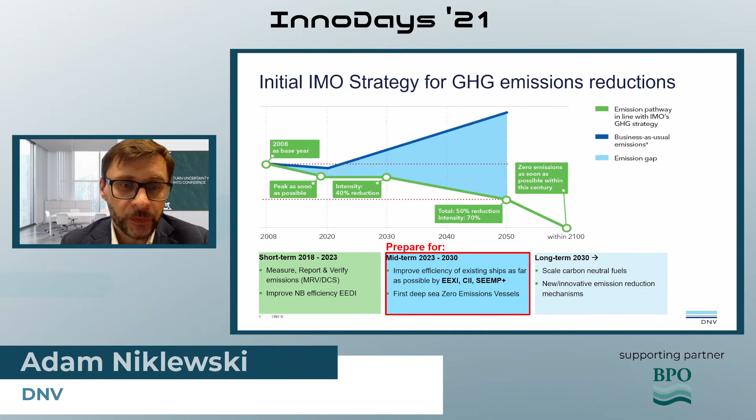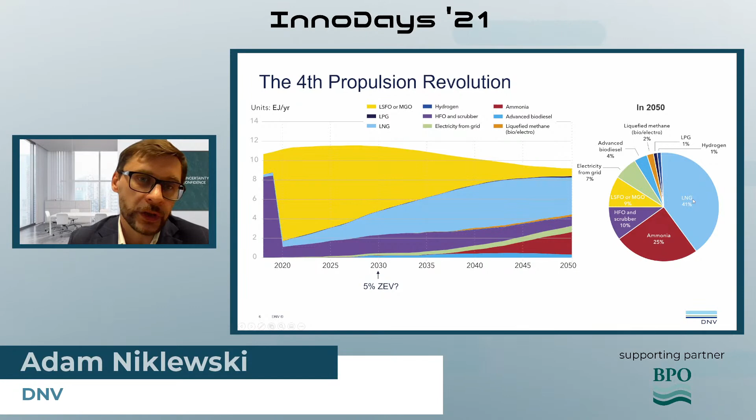Another graph which might possibly be known by some of the audience is the fuel mix of the fourth propulsion revolution, which we are now facing. According to the DNV outlook, it seems that LNG, which is one of today's topics, will definitely play an important role, reaching about 41% of the future fuel mix, which is very significant.

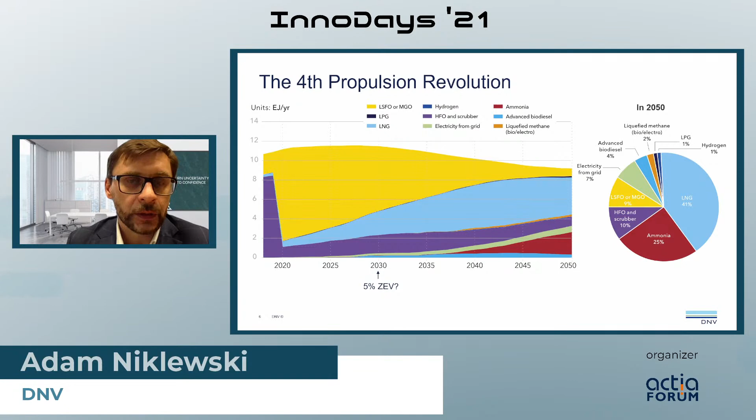And that can also be seen later on one of the slides when I present the current order book. So of course, this revolution gave us alternatives other than LNG, but we also need to remember that if we are talking about other energy carriers...

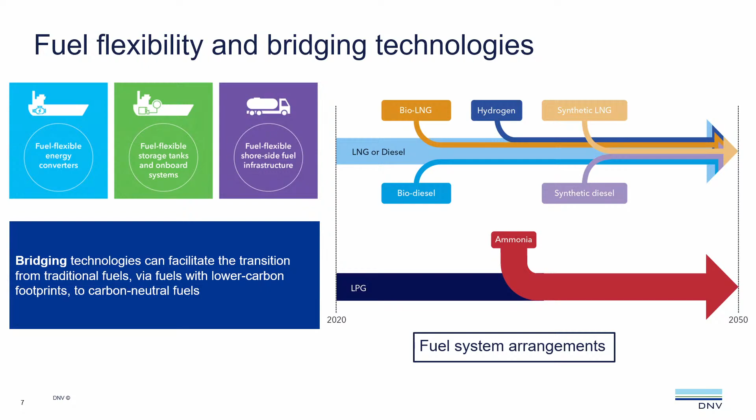Most of them nowadays still depend on hydrogen production via the steam reforming process. So methane is a key element, as long as green hydrogen is not yet available at a price level which is acceptable, which is another factor.

But let's go into more detail on the latest Marine Environment Protection Committee session, so-called MEPC 76. It's been decided that the CII, the Carbon Intensity Indicator, reduction was set to increase by 2% per year in the years 2023 to 2026.

After that, what comes next will be decided later on, and I will present the full timeframe for the common decision. What is also important in the context of today's webinar...

On the latest IMO MEPC committee, more detail was also given on the NOx Technical Code. So there is now a unified interpretation of the Technical Code 2008 - the clarified requirements for testing and certification of engines with Selective Catalytic Reduction systems, so in simple words, with catalyzers on board the vessel.

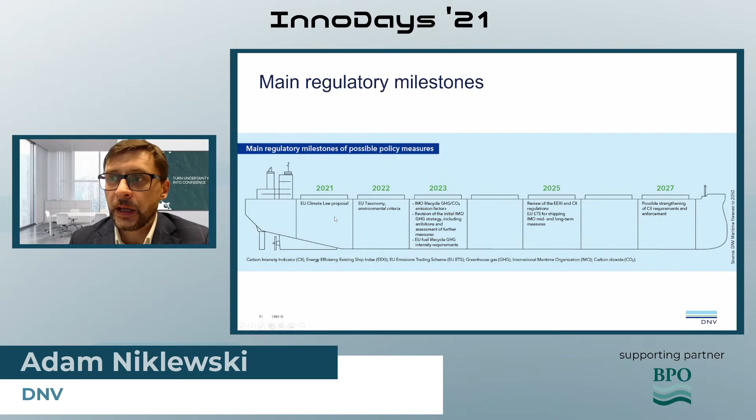It's important that now we have this EU climate law proposal, now known as Fit for 55. The taxonomy and the numbers especially will be decided next year, and in 2023 it will come into force if we are talking about the emission ETS handling.

And the details on the incentives to the use of certain fuels. Nowadays, what we can see, LNG unfortunately is from the EU point of view in a little bit lost position. So definitely the EU does not see LNG as the transition fuel, but that is not necessarily fully correct, because we are nowadays not considering carbon capture and storage, the sequestration of carbon dioxide, and that is due to the fact that we need to develop the infrastructure to store the carbon dioxide for the future and further processing for synthetic fuels.

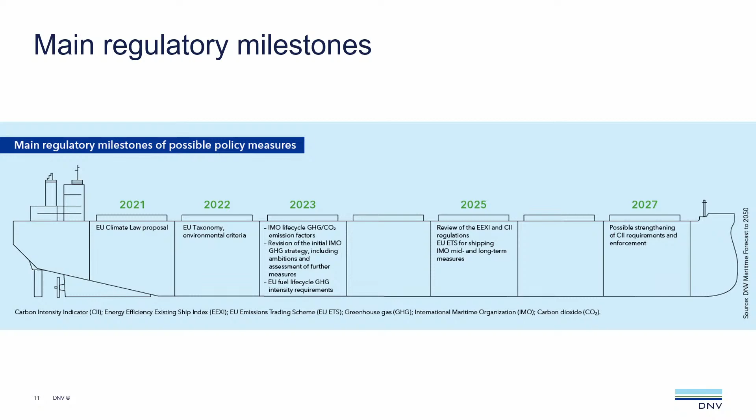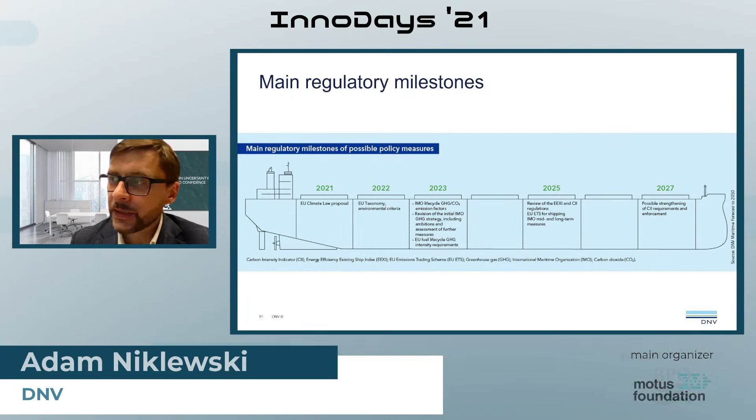I believe the other lecturers for today will give more details on synthetic LNG and its future. What is important in 2025 is that, going to the IMO first, the EEXI and CII principles and the data will be reviewed, and the next numbers for the years after 2027 will be decided. At the same time, the EU will reconsider the rates for the emission trade system. So in 2027, based on the decision in 2025, that will be the possible effective date of the new numbers.

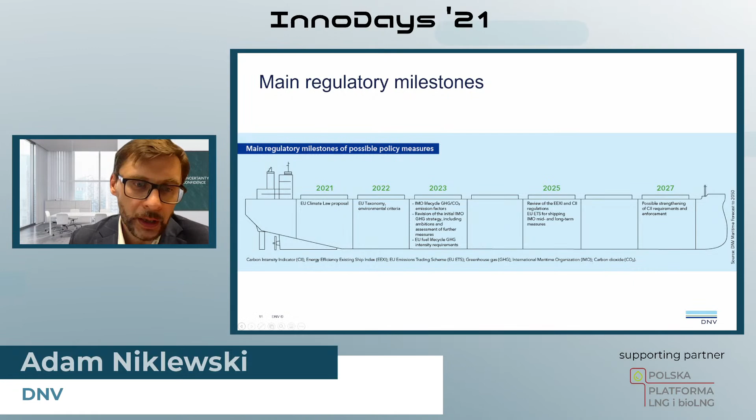So just to summarize the first part of my presentation about decarbonization transformation: it's about 1 billion tons of GHG gases which have to be zero by the end of the century. Once more, 70% reduction on carbon intensity within 2050 and 40% reduction in carbon intensity by 2030. That will require more than IMO regulation, and here locally the European Union gives a hand, or is at the forefront of this more ambitious and more regulated, more detailed regulated solutions. Definitely that will be a big need for investments, assessed at 1 or even 2 trillion US dollars till 2050.

What is also important, there is nowadays on the IMO agenda the research and development fund, which will be financed from a kind of tax on each ton of future fuel oil, and as well what we can nowadays see from market-based measures, if we want to capture the CO2 and utilize it effectively. Unfortunately, the price of that is calculated at $1,000 US per ton. Nowadays we know it's about 60 euros, so more or less unfortunately we are heading towards these kinds of prices.

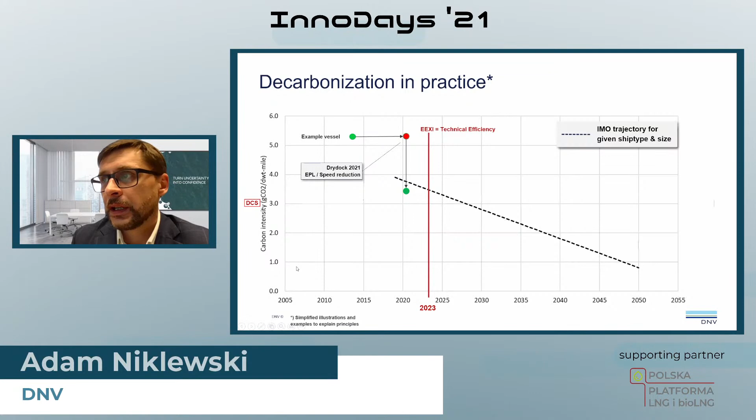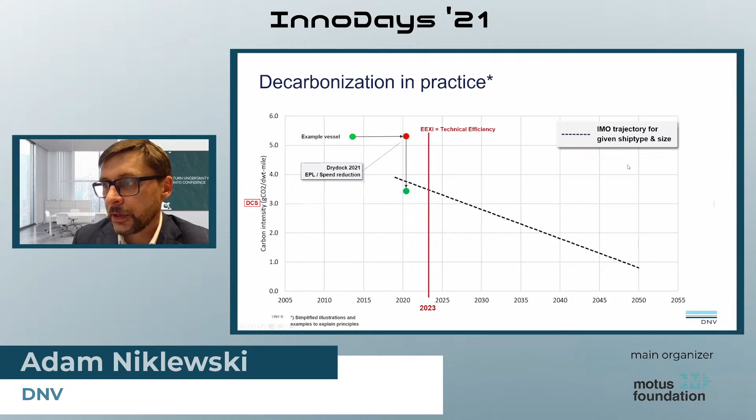So if we have the example vessel, and we made some measures to reduce the energy efficiency index of the vessel, one of the easiest is speed reduction. And then facing 2023, we place the vessel like that, but that is not enough. As you see, we have these grades on the CII operational efficiency, so the requirements will be more strict, and the vessel unfortunately will need to be adapted to the new requirements almost year by year, or it can be done once but with higher capex.

So our example vessel, which has its class period in 2026, the next one, so possible dry dock and some more improvements. In this example, the propeller was exchanged, and also it was given a nozzle, the Mewis duct type, which brings the CII level to class A in 2026.

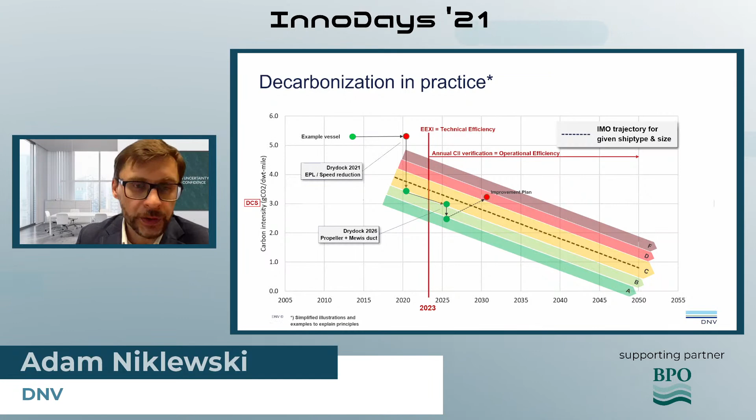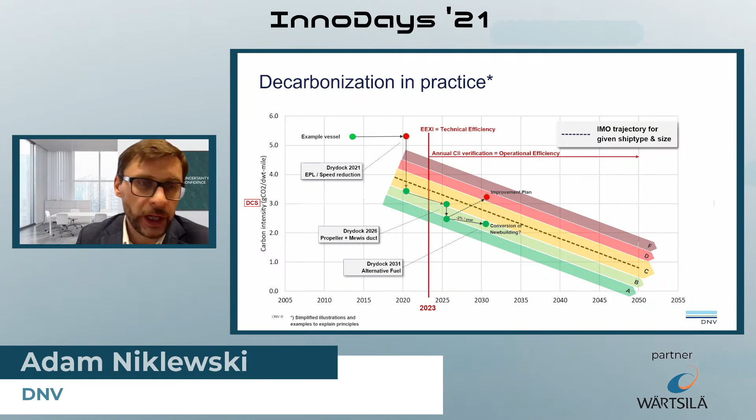But as time passes, we have some improvement plan. The vessel by time is also getting old, so from a machinery point of view the effectiveness decreases with age, so it will be necessary to have some improvement plan, or it can be solved by conversion or new building, considering a change to alternative fuel.

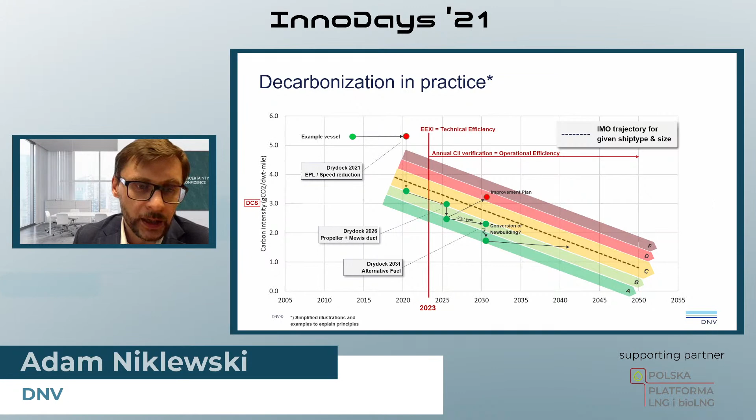So all this iteration has to be reconsidered as long as the life of the vessel. So what is important for the ship owners? The importance are, one more time...

Just a small refreshment on these dates which were presented previously. The SEEMP on board, January 1st - this is the first milestone to be faced. After that, on 31st of March, so 3 months later, the first CII reporting and rating has to be performed, and then EEXI by first annual survey, up to the end of 2023.

And how can DNV, in this stormy, let's say, environment of new regulation, new requirements, and a lot of actions needed - how can DNV help their customers?

First of all, in 2017, we developed a Carbon Robust ship offer, which is one that is competitive and thrives in any decarbonization scenario.

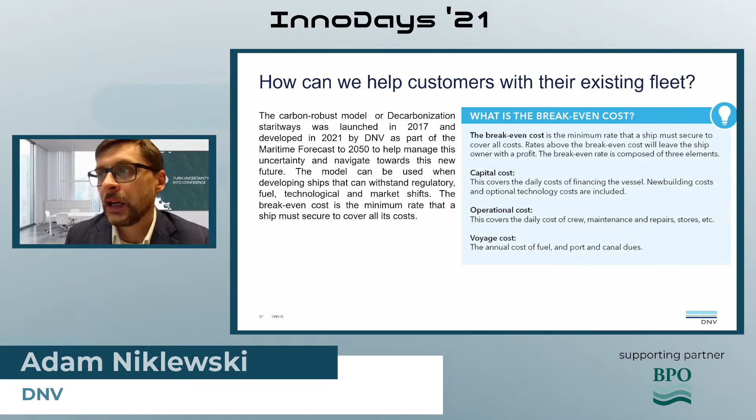Nowadays it's been even more developed into the so-called decarbonization stairway, how to deal with it. This is one of the DNV offers which might help to navigate within this new market waves.

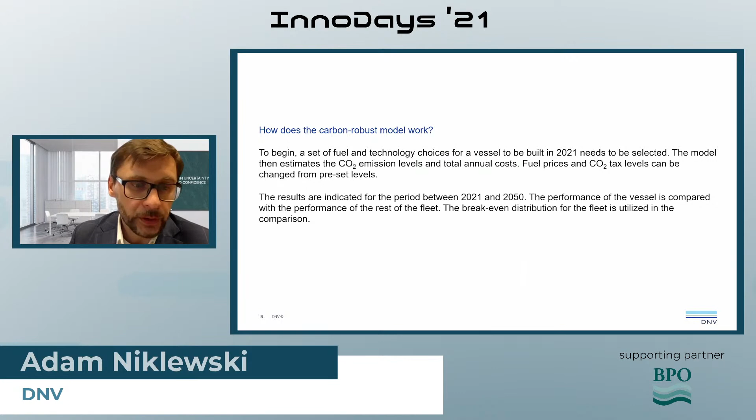I'm sorry, I'm going too quick. So if you combine this with the curve, which is actually the CII requirements, then we may support the owners with the calculation and basis for the decision to be made.

What is important on this calculation, and I'd like to be honest on that, is that the ETS trade rates are not yet established, so no benefits from CO2 sales is considered - but once that is established, we will of course adjust our model on that part.

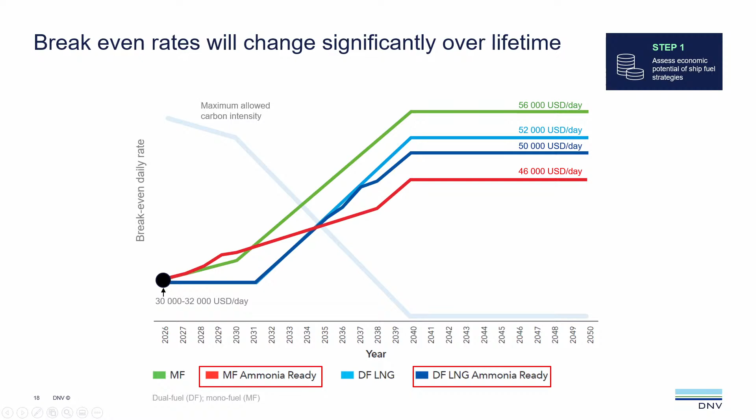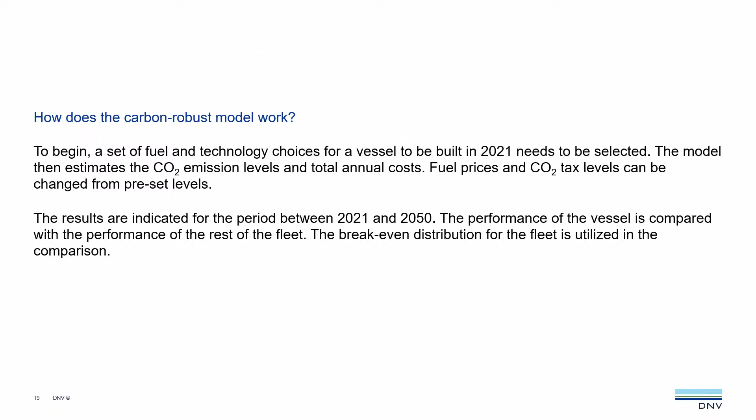In principle, how does it work? The set of fuels and technology choices for the vessels - now we are talking about new buildings - needs to be selected, and then we estimate the CO2 emissions and the total annual costs, as presented on the previous slides. The fuel prices and CO2 tax levels can be changed from the preset levels also presented by me.

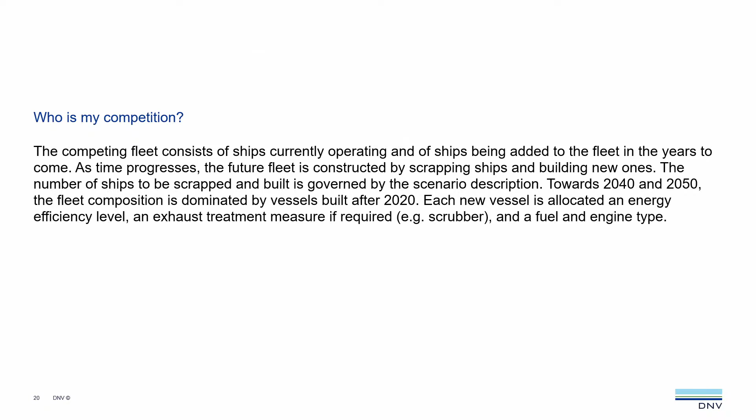What is also important is the definition of the competing fleet, because that consists of ships currently operating and ships being added to the fleet in the years to come. As time progresses, the future fleet is constructed by scrapping ships and building new ones. The number of ships to be scrapped and built is governed by the scenario description, which also gives us a strategic point of view on how to handle our fleets.

For example, air lubrication of the hull was one of the points which might be considered, and the hull shape that was presented in one of the first slides. Hull coating - I will show you an example in the next slide as well.

Then we can change the propulsion system, for example the nozzles. And then, very important, the alternative fuels.

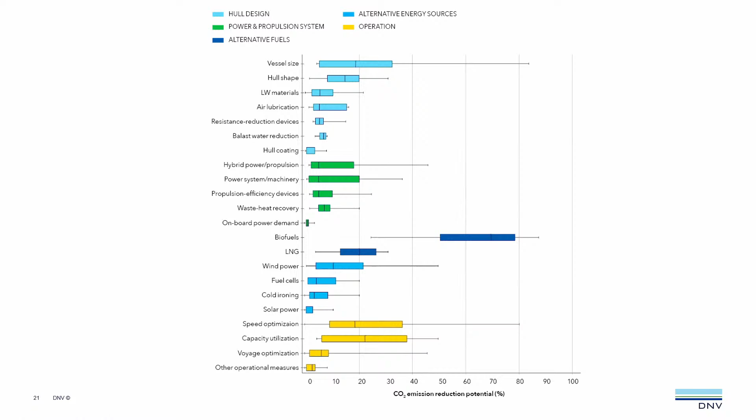Here I have considered LNG and biofuels, especially Bio-LNG, which can be easily blended with the conventional LNG and might give a lot of benefits, especially in light of EU regulation - at least at the hearing stage of the EU Fuel EU Maritime Directive. It's one of the acts which considers the fuel well-to-wake - the first act which considers the fuel in the full scenario, from harvesting to propulsion. So it might give a lot of advantages in that case.

And of course, the supporting energy sources received from renewables like wind, solar, cold ironing. This is, from my point of view, quite interesting. For me it was rather 'shore connection', the common name, but now we come back to the historical name called cold ironing, direct fuel cells, and others.

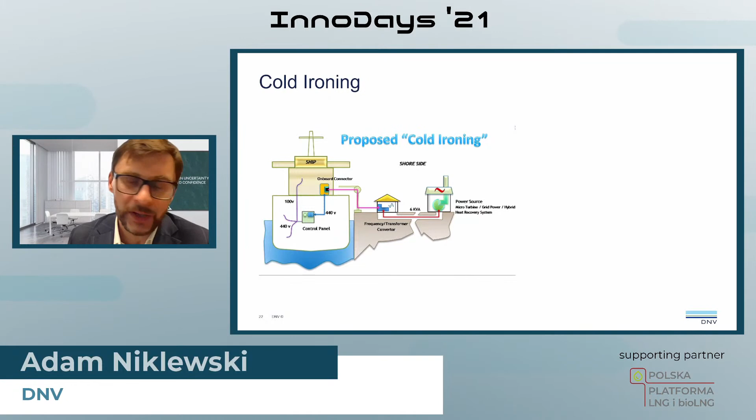And of course, then we have some possibilities on the logistics of the vessel. So it's an interesting point to understand what cold ironing is. In simple words, it's just a shore connection when the vessel stays at the pier.

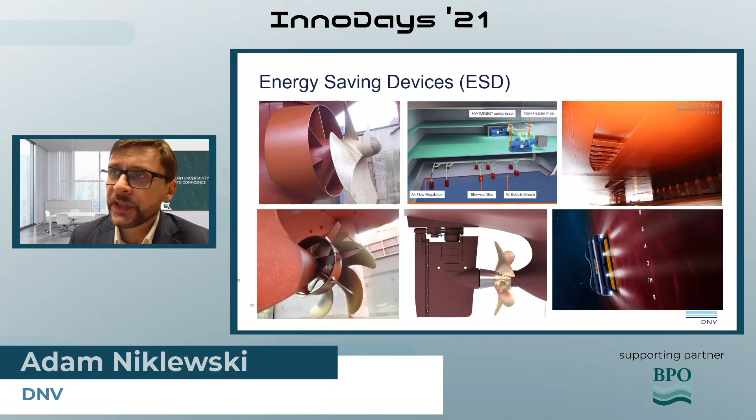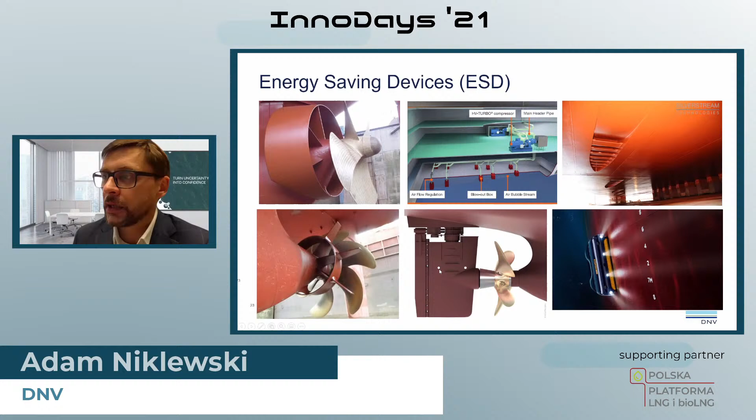Just a couple of examples how we can deal with ESD, energy saving devices. That might be nozzles, air bubbles, another type of the air generator by the hull shape. It can be, of course, the additional treatment of the coating with the regular cleaning and polishing, and of course the correct pitch propeller combined with the rudder system.

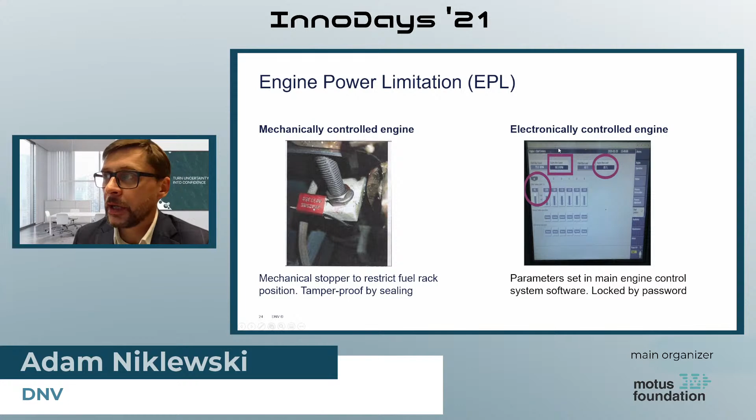The other solution can be the engine power limitation, either in the digital way control, or the mechanical, physical stoppers.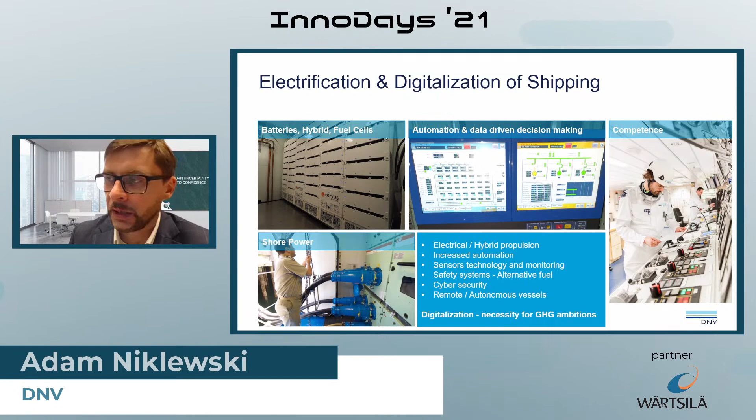And definitely without digitalization, if we do not support ourselves with digital tools on the steering of the propulsion and improve the ship route, that will not be able to be handled only by men. Supporting digital tools is critical and definitely necessary for the future.

Of course, we as a class society support this transformation, but definitely through ensuring safety. I'd like to skip to the next slides because I'd like to touch on at least the last part of the topic for this keynote speech. But before that, I'd like to present a couple of the tools which we offer at DNV.

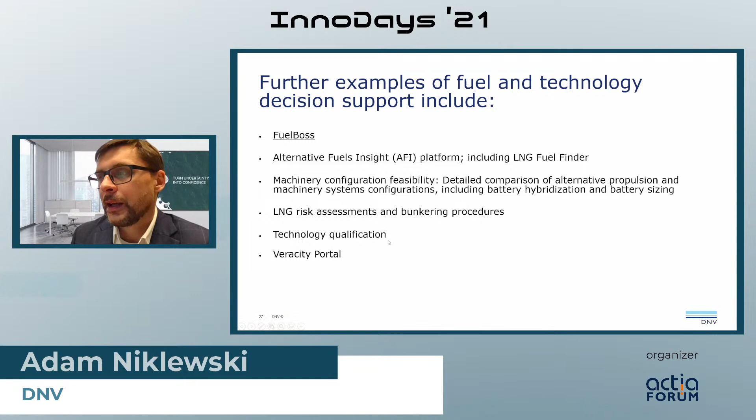It's the Fuel Boss application, the Alternative Fuels Insight platform, which you are very welcome to have a look on. That also includes the LNG fuel finder, a very useful tool with respect to LNG as propulsion. Then we of course offer the LNG risk assessment and bunkering procedures. We of course approve the technology, which is our core activity. And for existing customers, all other tools can be found on the Veracity portal.

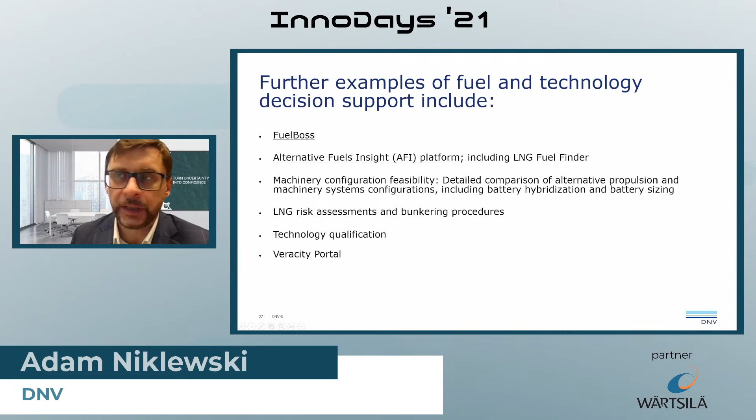So just to touch on more detail on LNG and the question in the topic - if we are talking about SOx, sulfur oxide, LNG is by definition a sulfur-free fuel. It's a little bit different if we are talking about nitrogen oxides.

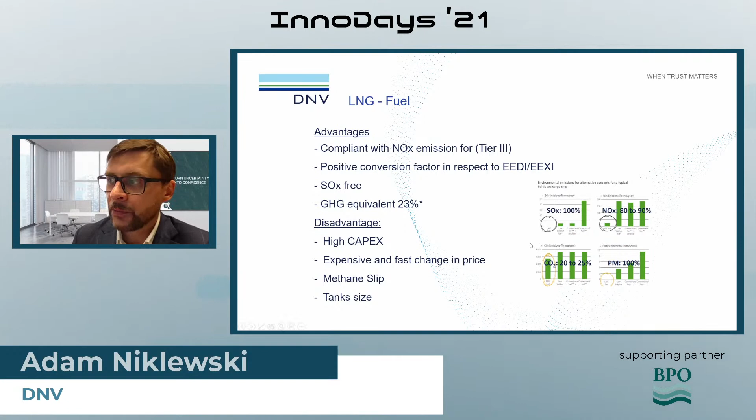Definitely, if we are talking about the internal combustion engine, the GHG reduction is assessed between 20 to 25%, but it might differ if we use LNG in a fuel cell, not in the internal combustion engine, because then we lose the bad impact of the methane slip, which does not occur in the fuel cell. So it can be even better results with LNG as a fuel, without the capture of carbon dioxide, which we are well known for. This technology is ready, and some examples of installation are in place.

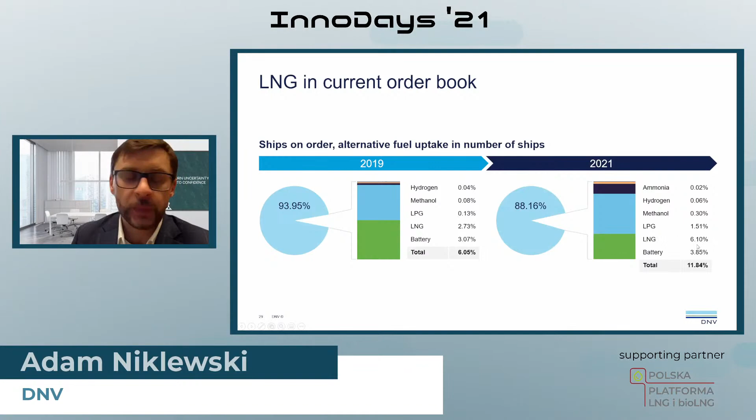I'm going to the end. Just to show you one more thing, LNG now in the order books is a significant position - 6.10% of the full order book on new builds. And regarding SOx statutory regulation, there's still in force the carriage ban, which is given by MARPOL Annex VI regulation 14, as I remember. And for LNG, nothing has changed because, as said, it is a sulfur-free fuel.

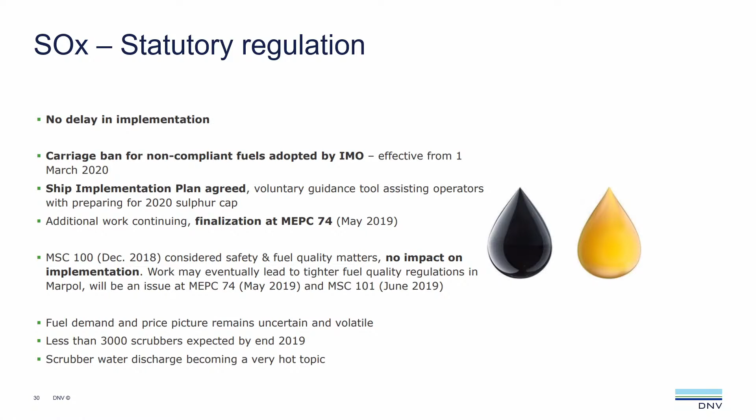If we're talking about marine diesel oil propelled vessels, now the sampling points - this is an element which comes into force already with the renewal of the IAPP certification. DNV supports, one more time, on SOx - especially our dedicated offer is the DNV fuel changeover calculator, which might be very helpful.

Just to summarize, a citation from the Brittany Ferries chief executive: LNG is just a step. We are fully conscious it won't solve it, but it improves. Those that use LNG show how committed we are to decarbonization, because it is a step forward, but we are all conscious it is a step. So just to show that LNG is not a perfect solution, but definitely it's a good step forward. And I would like to leave you with this message for the next presentation.

Thank you for the time. And just another thought - if you thought shipping was boring, look out for the challenge of decarbonization. Thank you very much.

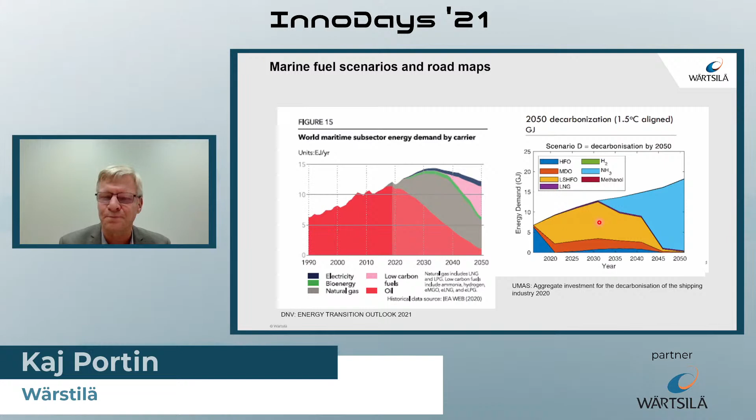I have also taken the UMAS Tristan Smith scenario. Some people believe in LNG, natural gas, as the takeover, and then also a part here for bioenergy and synthetic LNG. And then there are others that don't believe in it at all. What does this say to us? It says that we have to look into the future, how to get through the transition, how to come to net zero emissions, carbon-free, CO2-free emissions.

How we look at it is that today we start with what we have. Then, when we start to get new fuels, first we take drop-in fuels that we can utilize in the infrastructure we have together with the fuel we already use. Then we are also looking to blend fuels, either before the engine on the vessel, or in the cylinder of the engine, so you run on several fuels at the same time. In the future, when we start to get the better fuels, when they are available in quantity and price and beneficial to use for everyone with the legislation and cost, then we are ready to take them into our engines. How do we do this then?

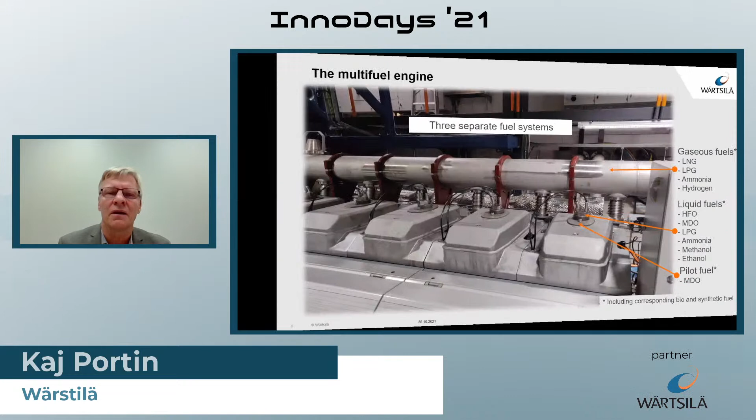Here I have my flexible engine in our laboratory here in Finland, in Vaasa. As you can see, this looks like a standard diesel gas engine that we have at Wärtsilä. We have now prepared this engine for most fuels by having three separate fuel systems, so we have a pilot fuel system. If you have a fuel that is not burning or igniting so well, we can ignite it first with a pilot fuel, so you can get it to burn in the cylinder, and then use the secondary fuel or the main fuel for the whole combustion.

Then we have a high pressure fuel system where we can have, in principle, all the liquid fuels available, and we can then use it in the engine just like a diesel engine.

And then we have a third fuel system, the gas system here on top. Here we can utilize gaseous fuels like LNG or natural gas, and also other ones you see on the list. The good thing is that this also includes bio and synthetic fuel. The engine doesn't know if it's a synthetic fuel or a fossil fuel, it looks at the molecule itself.

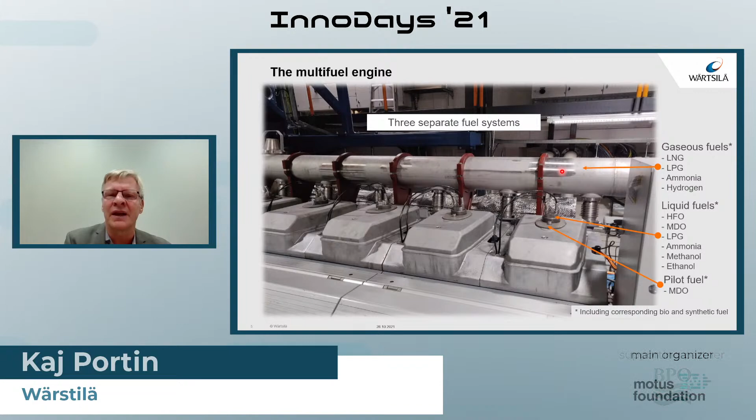This is very important for us when looking into the future, what fuels to use today. We are mostly today talking about how to take bio LNG into fossil LNG, and perhaps in the future also to use synthetic LNG. This is a very important one.

We see that for future fuels we have two main streams. Today you either go gas, and when you get biogas or biomethane, bio LNG, LBG, whatever you call it, you can easily take it in. And when you get synthetic LNG in the future, you can also take it in. Already today, as was shown by Adam, by using LNG, it's the cleanest fossil fuel that we have. Then by taking in bio and synthetic methane, we can also be carbon neutral.

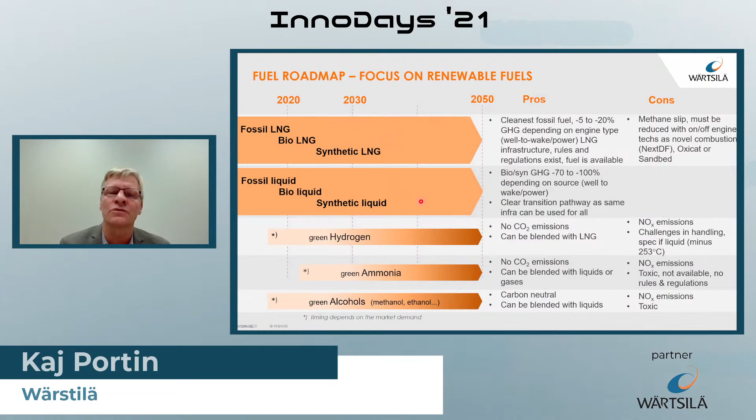The same path, without changing the infrastructure on the vessel and on the bunkering, as it's one-to-one. Then the second mainstream is that today we have diesel and heavy fuel engines and vessels, and these can also take in biodiesel, bio heavy fuel types of fuel when it comes, and also synthetic liquid fuels when they come. And if you have drop-in fuels that can be used, these can also be taken in.

At Wärtsilä, we will not discuss it too much today, but we are also looking into zero carbon fuels like hydrogen and ammonia, and also green alcohols, methanol, ethanol, etc.

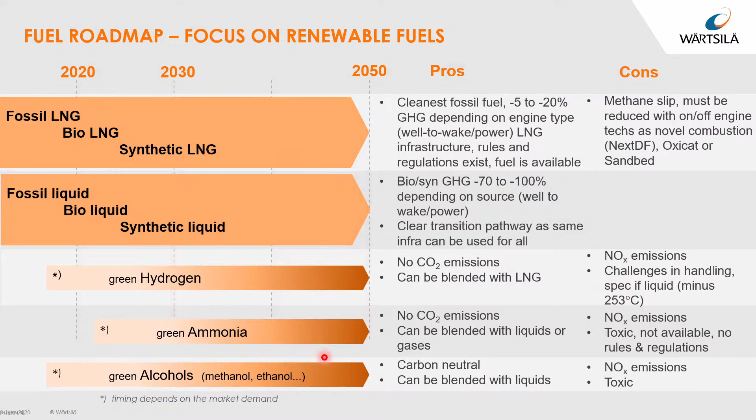So the future for taking bio, to go from LNG to bio LNG, that is already here. Today we have fossil LNG as a starting point, and we make fossil methane natural gas into LNG and then utilize it in the vessels. But we can also then add bio LNG.

To any ratio. So if we get 5% of bio LNG, we can add that. If we get 55%, we can add that. And also in the future, add synthetic LNG into the same vessel, the same system, and even the engine will think that this is a very good fuel. It will even think it's a better fuel than what it had with fossil LNG or fossil natural gas.

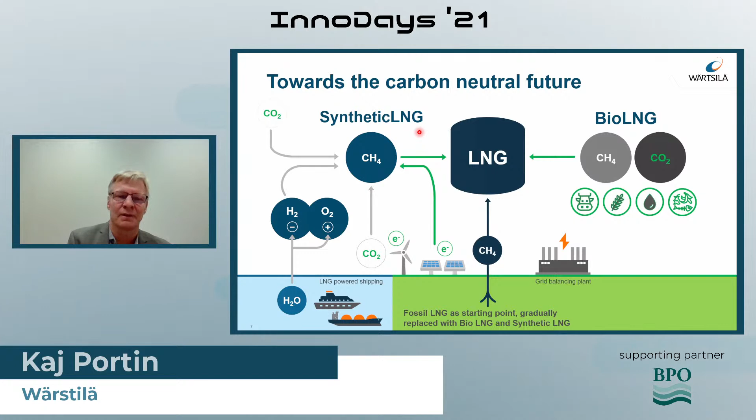One thing that I think Adam brought up that you seldom hear nowadays: we are now talking about CO2 emissions, greenhouse gas, and so on, but we should never forget that we also have local emissions. We have NOx, SOx, particulates that are polluting the air, and this is very important for people living in the cities and at the harbors, to have clean air to breathe.

And now when we are looking into the greenhouse gas emissions, so looking at CO2, methane slip, and perhaps also laughing gas slip, which can also come from using, for example, ammonia as fuel, and other ways too.

At Wärtsilä, with the engine, we cannot just look at one or the other. Sometimes when we look at only one thing, we forget the other, and we can even make it worse. So when we are developing our engines and systems, we are all the time looking at how we can improve both of these at the same time. This should always be remembered when talking about greenhouse gas, that you cannot be worse on the other things that used to be so important some years ago just because you have a new target. This is only for remembering. It's easy to talk about only one thing at a time.

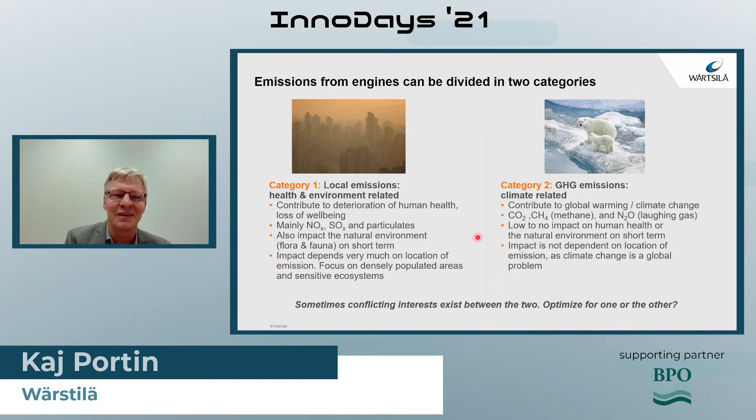This is also why we took LNG as a fuel, gas as a fuel in our engines and vessels 20 years ago when we started this - it was for the local emissions like NOx, SOx, and particulates. We could see that we had a huge reduction in NOx, 80, 85, 90%, and in sulfur oxides, as there's no sulfur in the fuel, we almost removed all the SOx emissions, and also the particulates. I looked at our Viking Grace vessel going in Finland from Turku, Åbo to Stockholm in Sweden, and there it was 93% reduction in particle emissions on the same engine running on diesel versus running on gas.

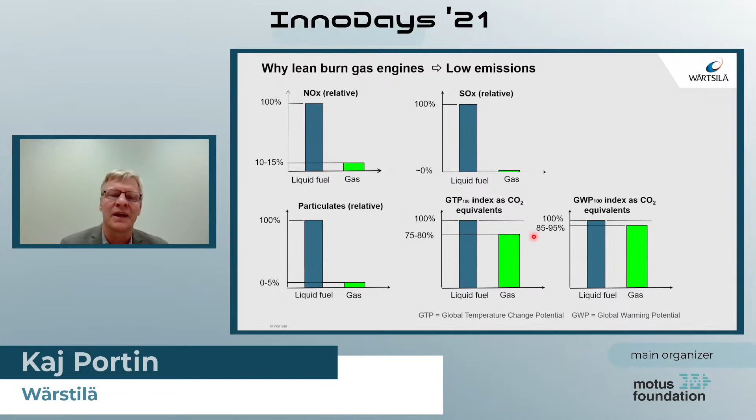Then we have also the greenhouse gas impact, and there is how you calculate it. You can calculate with the global warming potential, which is the most normal, and here I have used the GWP 100. There we have an improvement of 5 to 15% in our engines. And if you use another calculation, which is also mentioned in the IPCC, it's the GTP, the global temperature change potential. There you have more benefit of using LNG as a fuel.

Then biogas, biomethane - why should we go from fossil gas to biomethane and bio LNG? First of all, it's renewable, and it's in this circular business model. This is what everybody knows. The second more important thing is that we transform waste into valuable energy by doing this. The third thing is that we can more and more have local energy supply, so we can make our own fuel in our own country. And by that, you will also have work for the people if you are looking at what you want to do internally in your country.

If we look at how to utilize the biogas, we upgrade it first to biomethane and bio LNG, because then we can directly use it in the infrastructure for natural gas and in the infrastructure for LNG. This can also be used as green energy storage for power plants, and also to be used on the marine side. We also have to unlock the potential for vehicle fuels using gas, and we can see that we can have a domestic energy supply.

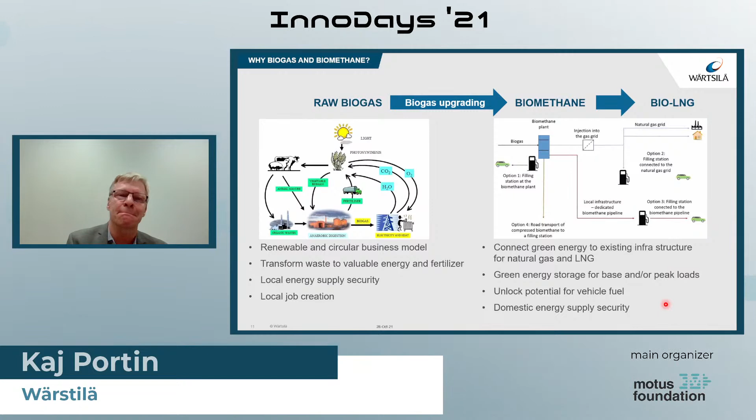What is it then, why is bio LNG so good? When we look at biogas, we can see that it contains half and half of methane and carbon dioxide. As such, this is a low heating value fuel that could sometimes be difficult to use. But immediately when you liquefy it and make it into LBG, you remove all the components that the engine doesn't like, and you remain with pure methane. This is a very good fuel for the engine because it will be stable, it will not change over time, and methane in our gas engine has the best combustion model we use - our engines have been optimized for a long time for utilizing methane as a fuel.

We will also have another benefit when you store LBG. Fossil gas will age, so the lighter components will go away and the heavier components will remain. But as this is only methane, everything that is boiled off is the same as what is left in the tank. So you will not have an issue with aging in the fuel tank on the vessel.

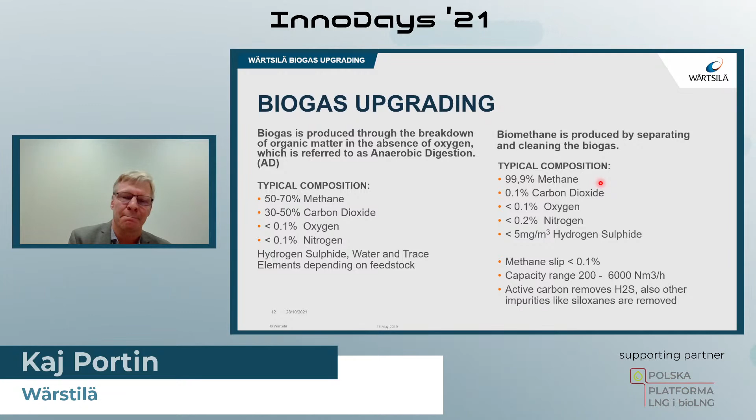Wärtsilä is in production of LBG. This is not my area, but I just show it as a picture here at the end - we are in this bio LNG plant in Norway, and we can see that this is doable, and it's already started.

Just to show you in the end how you can achieve the 2030 goal - is it far away when we looked at having a 40% reduction in greenhouse gas or CO2 emissions by 2030? Are we far away now with our vessels and our engines? I have made a quick calculation on the CO2 equivalent, where I have also used the methane slip, the GWP 100, as a base of calculation.

If you take this, used on one of our engines, just as an example - if you have the same engine running on HFO, heavy fuel, today, you will have a CO2 equivalent of roughly 550, 560 grams per kilowatt hour. Already by changing it to methane fuel - calculated here as pure methane fuel - you will have a reduction of CO2 equivalent by almost 20%.

And then you just add bio or synthetic methane to the extent that you want and need. In this case, I have added 30% of biomethane, so then I can calculate away the CO2 emissions. I have not calculated away the methane slip emissions, but the CO2 emissions, because it's in a circular route. So by adding 30% of bio gas LBG into the gas fueled vessel, you can already today rather easily come to minus 40%. And this is only by changing fuel.

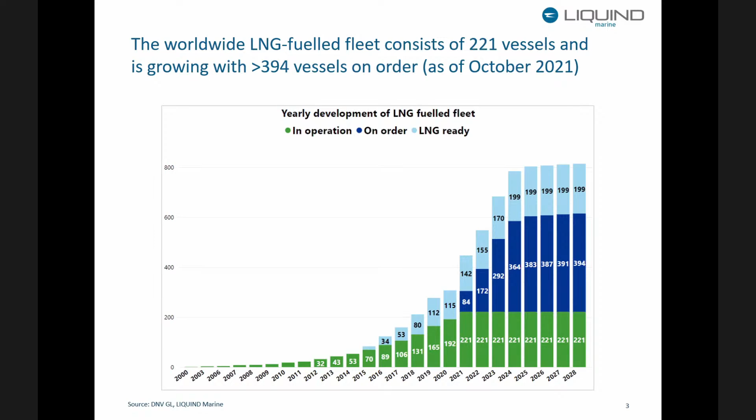We heard already something about the DNV portals that provide very good information about the current situation in the market. This graph comes from one of these portals, and it shows quite well why we are currently doing what we're doing. There is a growing fleet of vessels. Here I focus only on the LNG part of that fleet, not on the other alternative fuels. But overall, you can see there's a significant growth, and it will continue to be like that in the next years.

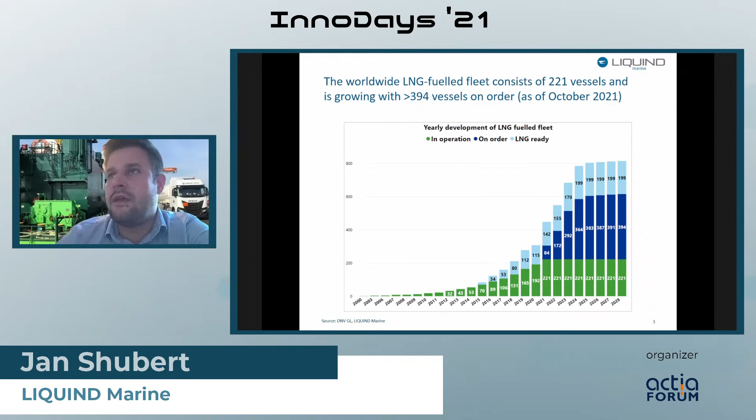This is only the number of vessels that has been ordered by now or that are in operation by now. I think we will see way more of these orders coming in, especially when you look at last weeks, there were always around 30-40 vessels ordered with an LNG or dual fuel engine every month. And I think it will continue like that.

At the same time, when we look at what type of vessels are ordered, it's basically everything from very large container ships and cruise ships to smaller tankers, fishing vessels, tugboats, offshore supply vessels. So there's a wide range of ship types, and in the end, all these vessels need their fuel, but they need a completely different setup to get their fuel. Obviously, it's something completely different if I supply 18 tons or 500 tons.

I would like to show how this is actually done these days in the Baltic Sea region, and what it might look like in the coming years.

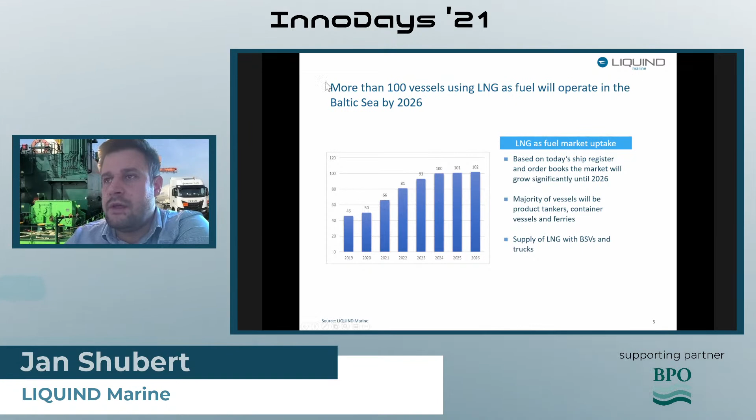When we look at the Baltic Sea specifically, breaking down these numbers, we are talking about roughly 100 vessels that will be in the water in the next years, and regularly call ports in the Baltic Sea region. These vessels obviously need supply. Not all of them are receiving their bunker fuel in Rotterdam or somewhere else. They also want their fuel in the Baltic Sea. And when we look at the infrastructure needed for that, it has to cover a very large range of demand.

So basically, stating again what I said before, there are ships that have rather small consumption or rather small drop sizes that they can take because of the tank size, and then we have these very large vessels. We currently don't see these large container vessels in the Baltic Sea, but we see the cruise ships for sure. We see these tankers, we see Viking Line with their ferries, and we see also the smaller tankers operating in the area. In the end, there's three established ways to get the fuel to them: either they bunker directly at the terminal, they get it by truck, or they receive it from a bunker vessel.

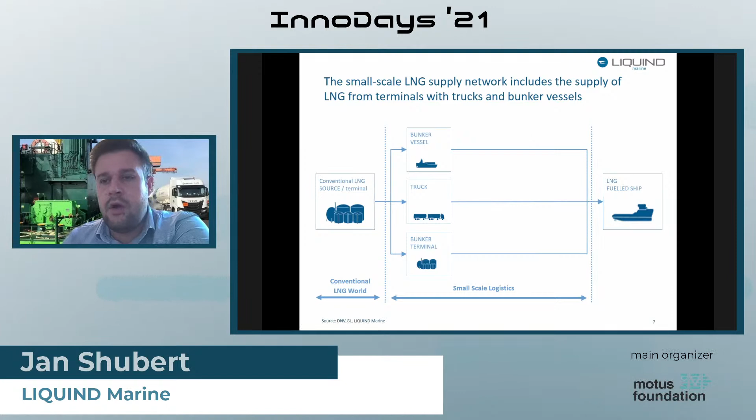When we look at the current infrastructure in place in the Baltic Sea region, we have three larger terminals: the one in Świnoujście in Poland, Klaipėda in Lithuania, and Vysotsk in Russia, which is less a storage terminal and more a liquefaction plant, but from there LNG is supplied to marine customers. Then we have a range of smaller terminals already in operation, especially in Sweden and Finland, and several smaller terminals under development or already under construction. So there is a good basis to transport LNG and make sure that customers get their fuel.

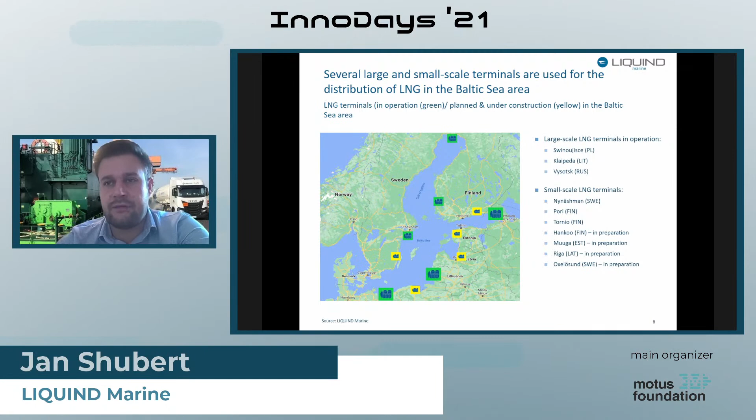In Finland, we have a few locations. We have a few locations now in Poland that have been developed over the course of the last years, and we have some spots in Germany. Other countries like Latvia, for example, don't have any activities like that. And in Lithuania, there has only been one, maybe two bunkering operations so far. So there is still some room for development, but at the same time, there is already a substantial network for the supply of LNG. Not all of these operations are taking place in ports, so for a lot of customers, it's also very attractive to do bunkering at anchorage.

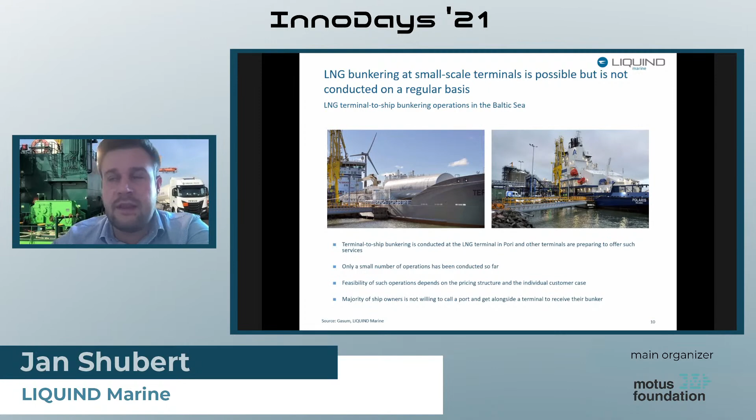When we look at the more popular ways to get fuel to customers, then we have truck to ship, which is the obvious case, mostly for smaller vessels and those operating on a more permanent schedule. Looking at locations, it's again Sweden, especially around the terminals in the east, Nynäshamn, and in the west, in Gothenburg. You have a few of these operations in Poland now, around Swinoujscie. And in the east, when you look at Finland and Estonia, these molecules are mostly coming from Vysotsk in Russia.

In the end, it provides a lot of flexibility. You can easily provide smaller volumes for vessels, so when you look at the cost structure, this is very attractive. But at the same time, you're also limited because it's a challenge to get a sufficient number of trucks to these locations, and it takes a while to unload several trucks. You can combine a few, unloading 2 to 3, or maybe 4 trucks in parallel, but you will still have a significantly lower pump rate compared to a bunker vessel. So that's why it is done, and it will remain attractive for a few vessels, but especially for the larger ones—cruise ships or large tankers—this is not an option, because it's just not possible from an operational standpoint to execute these operations in a timely manner.

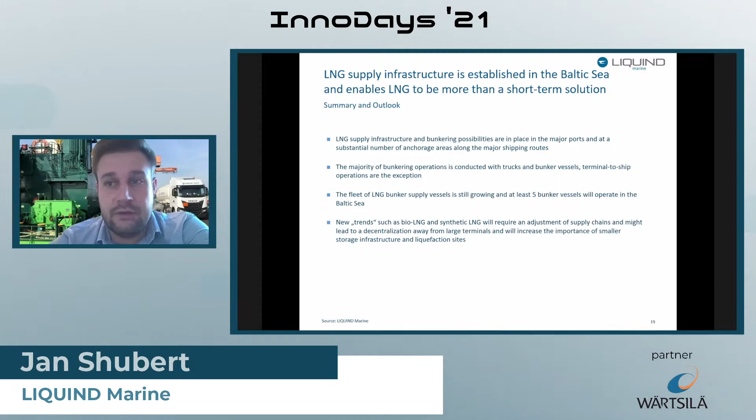At the same time, these new trends, as I'd like to call them, especially bio LNG and synthetic LNG, might also have an impact on infrastructure, because it will drive the focus a little away from larger import terminals and more toward smaller terminals and smaller liquefaction units, since this is where these fuels are actually produced. They're not produced on a large scale basis yet, and therefore the infrastructure might change. It might be that different ports do bunkering, with different supply chains. But I think the industry is at a point where it's established enough to ensure supply, while still flexible and young enough to adjust to these new requirements.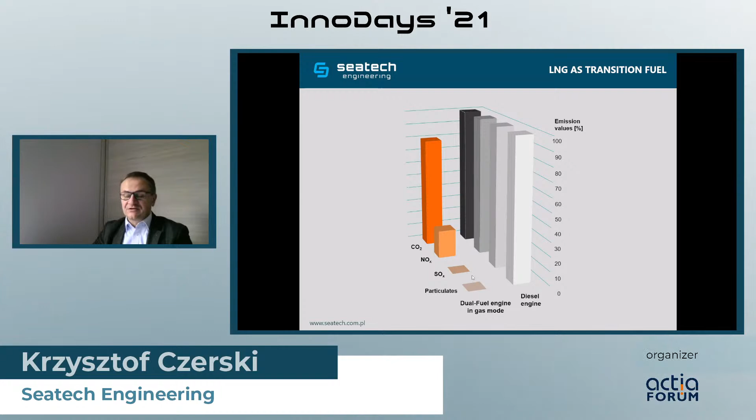This is again a repetition of the slide showing environmental emissions from LNG, which is coming from methane. Of course we have CO2, which is reduced only by 20% compared to conventional diesel fuels. But for example NOx we have 85% reduction, and SOx, in particular, is also almost 100% reduced.

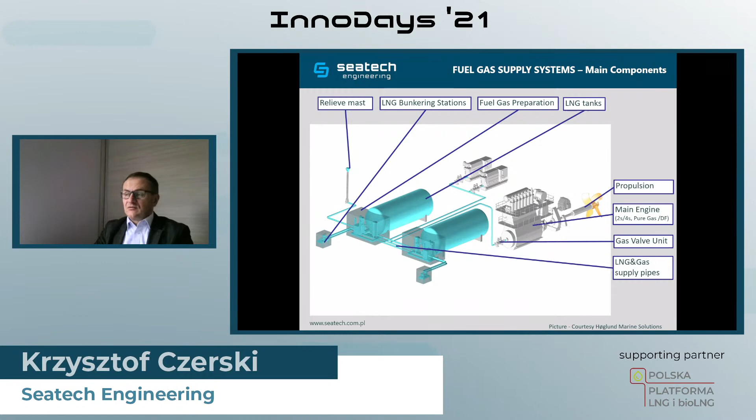Let's concentrate on the tanks. According to IMO, we have 2 groups of tanks: independent tanks and integral tanks. For independent tanks, we have 3 groups: type A, B, and C. Type A is quite new technology, but maybe not new, because it's old, but first used on board about 3 years ago on the Saga LNG carriers built in China. The Wärtsilä gas system was involved in the cargo handling system, but for the cargo containment system, a Norwegian company, LNT Box, was involved - the first application of this A-type LNG tanks.

We have the spherical type, most famous, because when we close our eyes and somebody asks us about LNG carriers, we see these beautiful ships with balls on the decks. This is exactly the spherical moss type developed in the 60s by Moss Maritime in Norway. We have prismatic tanks developed by the Ishikawajima shipyard in Japan. Outside Japan it's very seldom used, but in Japan those two technologies are still quite often seen.

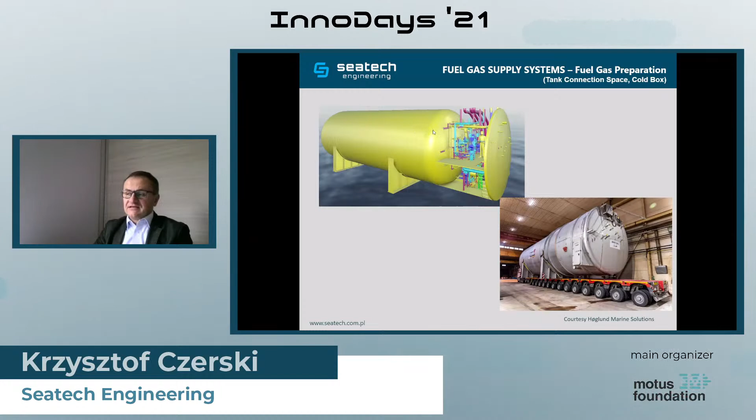Inside we have all the equipment necessary to make the gas from the liquid LNG. There are the heaters or vaporizers needed for the vaporization of the LNG, and we have this pressure build unit which takes a small part of the LNG, warms it up, and injects the gas to increase the pressure to pump the gas away to the engine.

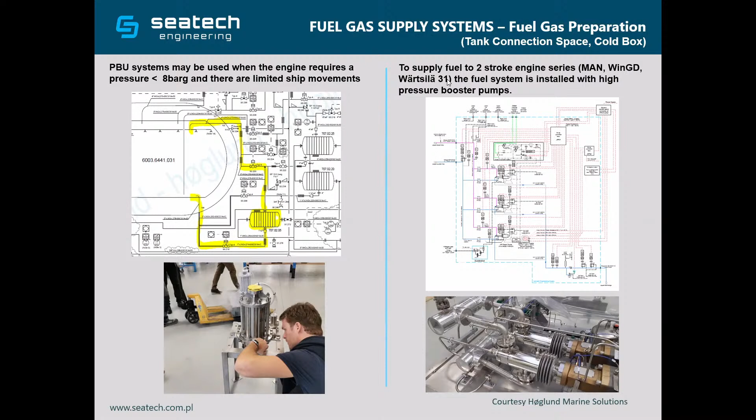But this is applicable only for engines running with injection pressure below 8 bars. For above 8 bars, like MAN 2-stroke, WinGD 2-stroke, and also Wärtsilä new 31 engine, we need higher pressure, so definitely we need some pumps.

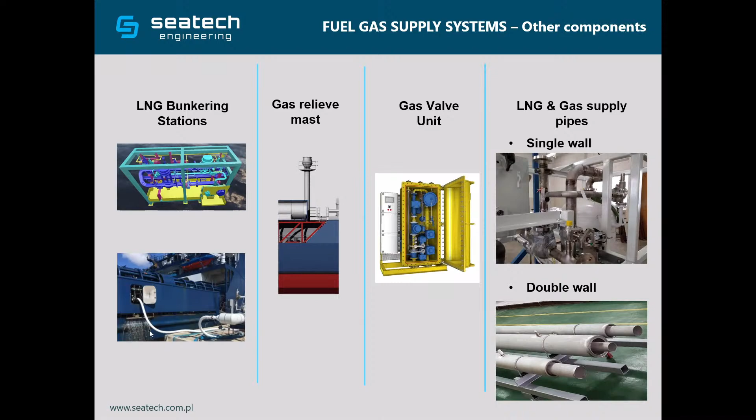Some other components like LNG bunkering stations can be a skidded station for a retrofit project, or can be built into the structure. What is important is that we should have a water curtain on the bunkering station, which protects the ship structure against dropping LNG. Because if drops of LNG land on the normal steel structure, that structure will immediately crack. So we have to protect it, and the water curtain is for protection of the side of the ship.

We have the gas relief mast in case the pressure increases too much, so we are venting up the gas. We also have the gas valve unit - this is a picture from the Wärtsilä gas valve unit, which we use to steer the amount of gas injected to the engine.

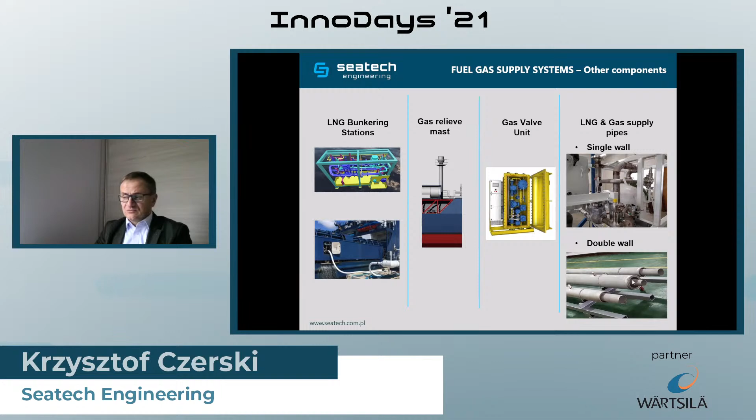And of course we have the pipes. We have single pipes on the open decks or in compartments where we have the hazardous zone, meaning all equipment in that compartment is ATEX rated. If we have normal compartments, we have to use double walls, and in the normal compartment this gas valve unit is in a special sealed envelope. So outside is safe area, and outside of the pipes is also a safe area. Inside the pipes, between the inner pipe and the outer pipe, we have inert gas and a lot of gas sensors. In case of any leakage, we have an alarm and an emergency shutdown system.

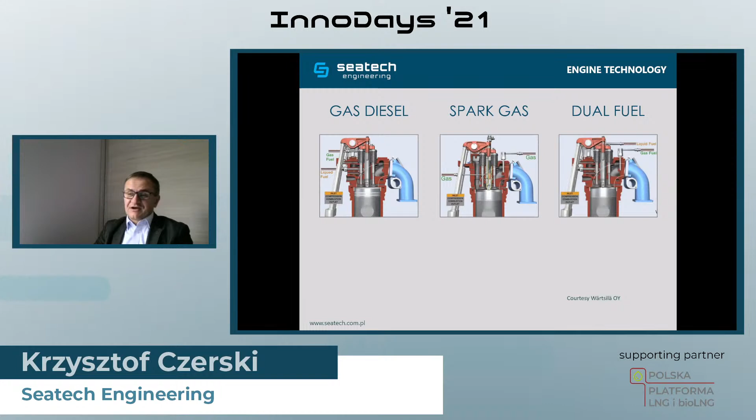I would like to present some animation which I received from my colleagues at Wärtsilä. There are different types of gas engines. Probably you know this technology very well, so I would like to run through these animations quickly.

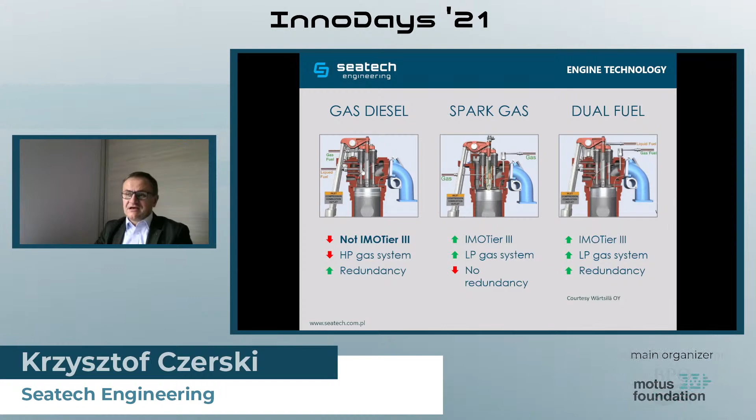Of course, we have the gas diesel, which runs with high pressure gas injected into the piston chamber, and there is an explosion, then combustion, and outlet of the exhaust gases.

We have the spark gas engine, which normally, like on petrol cars, has an igniter which gives a spark to ignite the gas.

And of course we have the dual fuel technology, which is very typical for example for the dual fuel four-stroke engines in the portfolios of Wärtsilä, MAN, and MAK. This dual fuel is most popular because the system has redundancy built into the vessel. But for example on the spark gas engines, we need redundancy for a different propulsion system than gas. Therefore, we should have, for example, a second diesel engine, or a second independent gas engine with an independent fuel line.

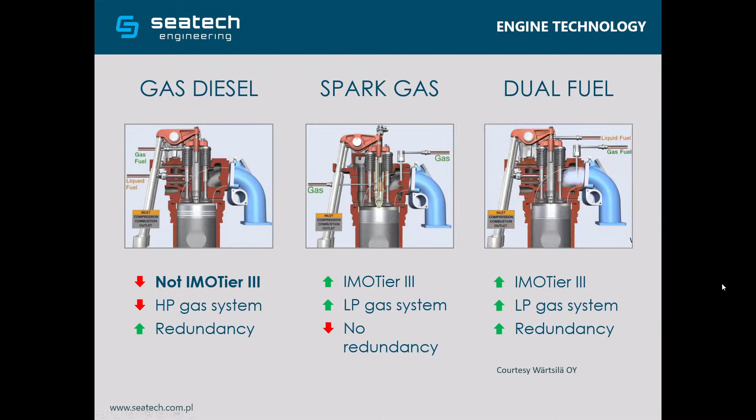So the biggest and the most powerful LNG fueled engine is from WinGD. This is a former Sulzer, former Wärtsilä two-stroke engine developed in Switzerland, in Winterthur, built in China. The engine power is around 64 megawatts, running on diesel and also on LNG, with diesel as the pilot fuel.

This engine is installed on, for time being, the biggest LNG fueled ships. This is also the biggest container vessel, 23,000 TEU, CMA CGM Jacques Saade. This is the first vessel of a series of 14, or 12 ships. But CMA CGM announced that by the end of 2024 they will have a fleet of 24 big container vessels running on LNG.

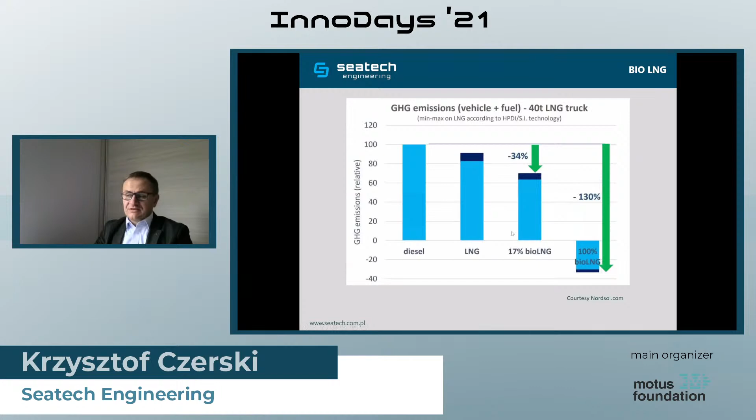In the end, I like this movie very much because I grew up in the 80s - Back to the Future. I hope you remember the scene at the end of the first episode, when the crazy scientist uses waste to fuel his DeLorean. I suppose this should be the future - bio-LNG will be the future and will replace LNG. I'm really very enthusiastic about hydrogen, and about ammonia and methanol maybe less, but I suppose the amount of those fuels used in the maritime industry will be much smaller than bio-LNG. So thank you very much.